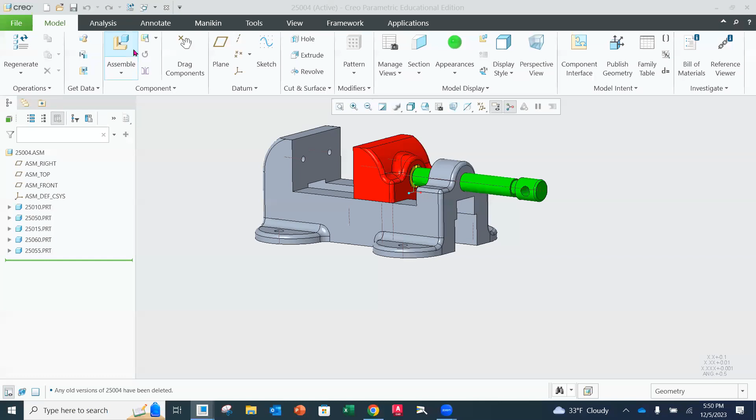As we look on our assembly, our jaw plates are number 25030. So we're going to click on assemble, and 25030, there we go. And those are going to be those jaw plates. You'll notice that it automatically comes in here. I'm going to kind of bring this down here.

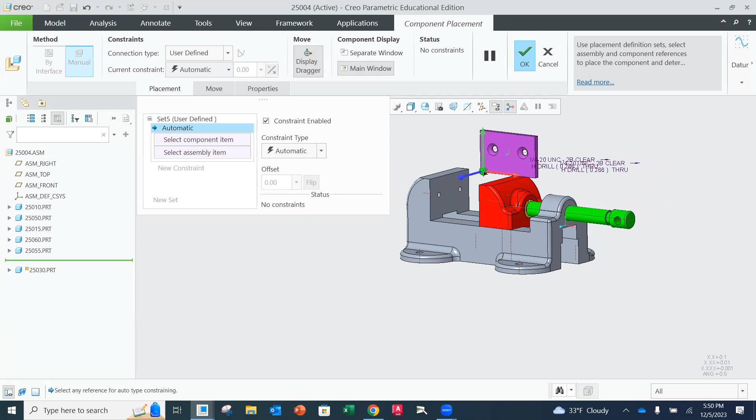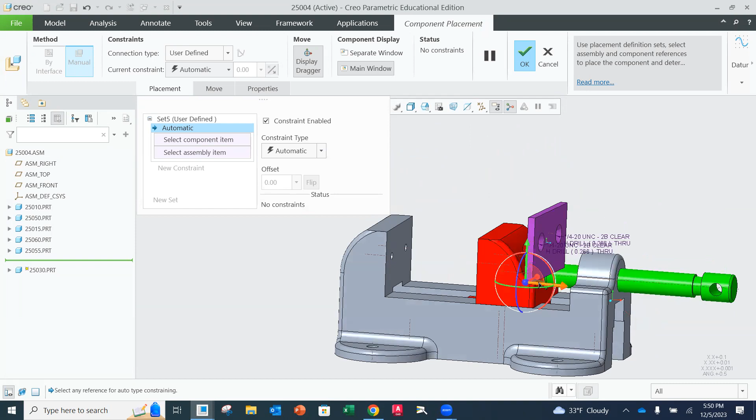I like to bring it over and get it as close to where I want it to be before I start adding constraints. So I'm going to rotate that around, bring... oh, that's not what I wanted. I want to grab... oopsie, not that one, this one. I want to pull it over here, bring it down. Again, it doesn't have to be perfect. Sometimes it's like, oh, I thought it was closer, and it's not. So just kind of bring it over. Oh my goodness, can you believe it?

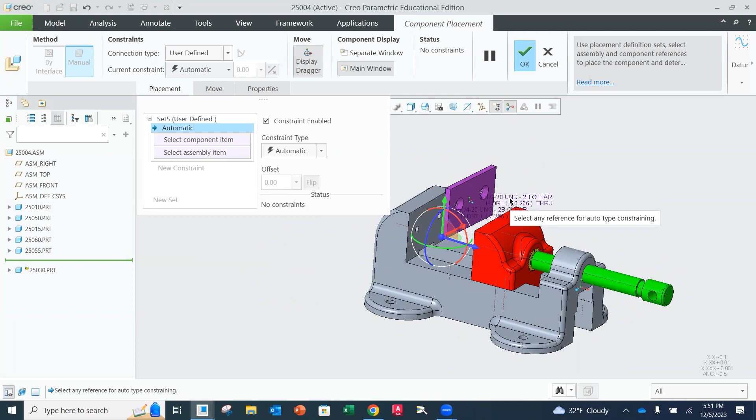Do you ever get that where you're like, I thought it was way closer? Now, the question was asked before about these callouts. I'll show you after we get this in place how to get rid of those, because in the model they're not needed and they're not going to go away for any reason later on either. It's just nice to not have them clutter things up.

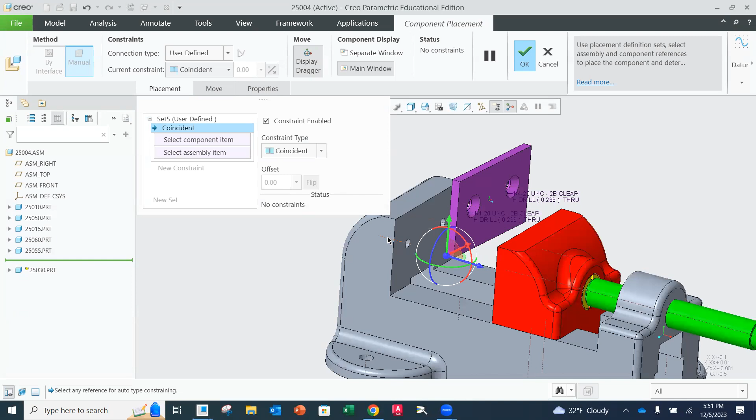Okay, so now the first thing I'm going to do is put my axes of my countersunk holes in line with the axes of the threaded holes. So I'm going to do a coincident, this axis and that axis.

Then the next thing I'm going to do is make a new constraint, coincident, this face and this face. And you'll notice that I'm fully defined.

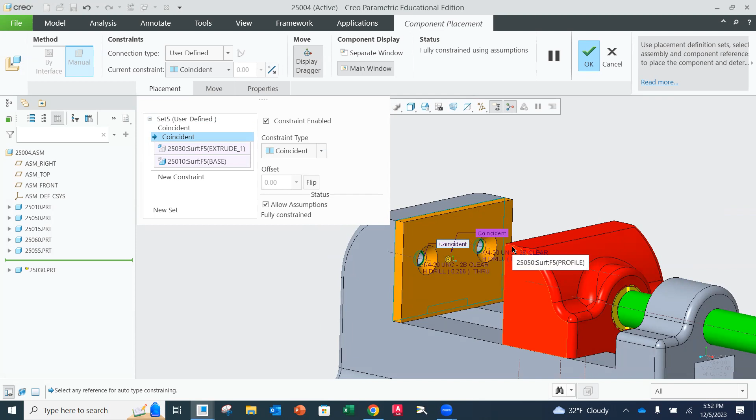Which is good. The only other thing I feel like, because remember, if I have an axis to an axis, Creo lets it be okay, but it's also good on a rectangular piece like this, especially if the sides are supposed to be in line with each other.

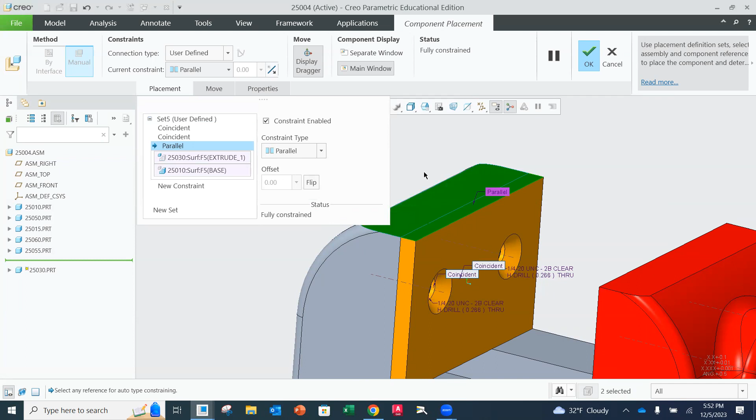Then I like to put an orientation like parallel on one of those outside surfaces of that plate. So I like to add a new constraint, just a parallel. It doesn't mean it's going to be coincident, I just want them to be parallel to one another. I'm going to take this top and this part right here, and say okay. Now they're nice and parallel and oriented, even though it would have been fully constrained the way it was. It's just to ensure it's not cocked one way or the other.

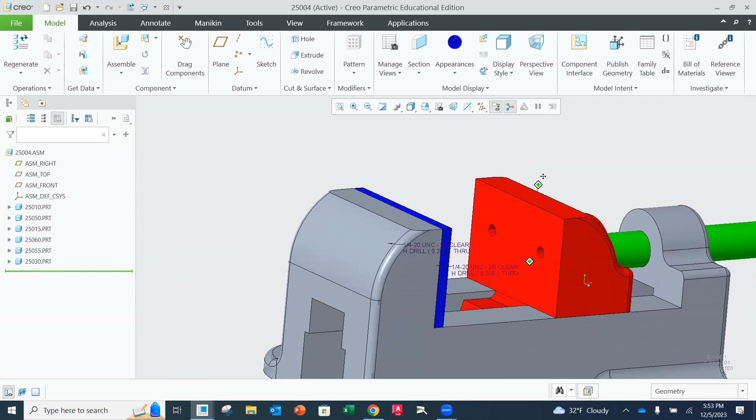Then I'm going to grab this one and we will make that blue. And then we're going to put that very same plate on the other side here of our sliding jaw.

So I'm going to assemble, grab that same part back in. Now, again, you can copy. I think somebody asked about copying the last time. Just be aware that if you copy the part in the design tree and paste it down below, or special paste it, it's going to hold those same constraints from that original part.

I like to bring one in. It's not that hard to bring it in. I like to bring it in fresh and then just constrain it to my new surfaces. But either way works, okay? You'll just have to sift through the constraints that are there.

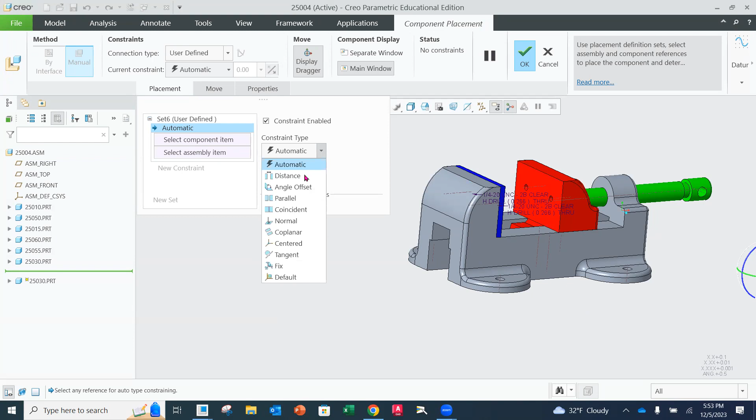Then I'm going to grab, I'm going to do coincident. Oh, no, I want to orient this first. Sorry, I forgot that I brought it in. So I'm going to bring this over here, rotate it around, pull it up and forward. There we go.

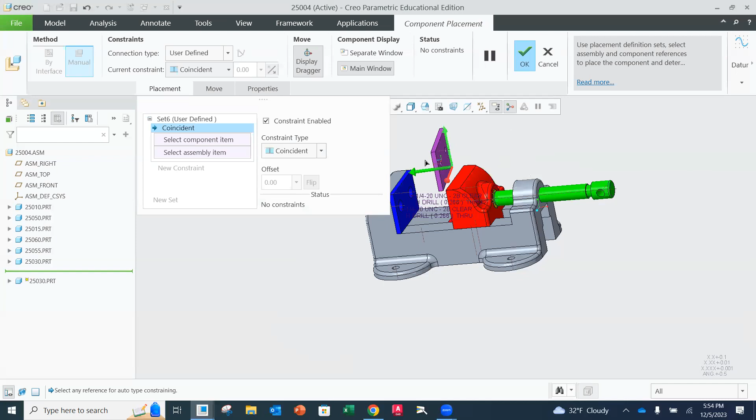And then I'm doing coincident, so I want one of these axes to be coincident to the other axis. And then I'm doing another constraint, coincident from this surface to this surface.

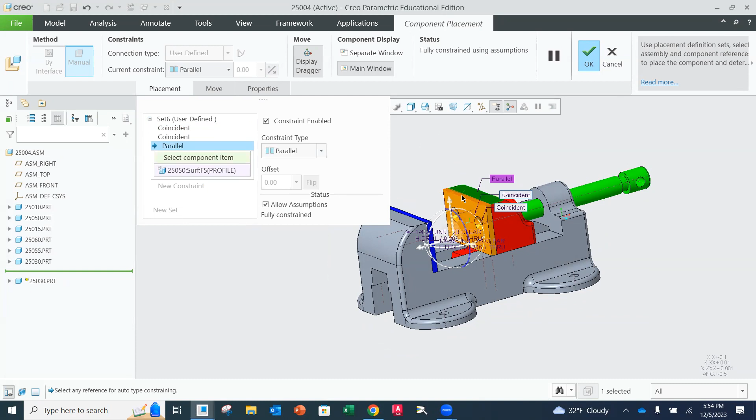Now I am fully defined, but I'm going to still add a parallel of the top to the... see, it's rotating around. Which way did it go? The top to the top. There it is. So that's going to ensure that it doesn't rotate around.

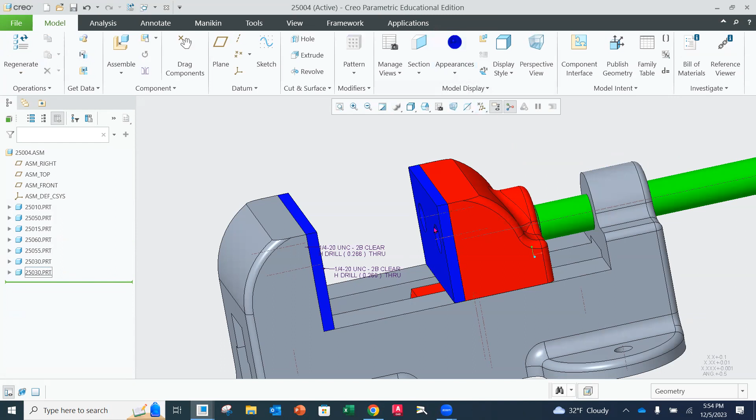So now I'm okay, and I'm going to change that one to blue as well. So now I'm going to get rid of these callouts. I'm going to grab that one, left click, slow right click, and hit hide. Left click, slow right click, and hit hide. There we go. Okay, this looks good.

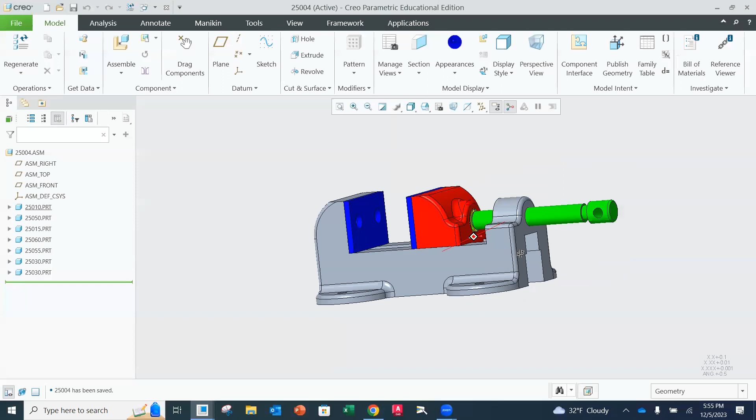I'm going to put the hardware in at the end, so we'll leave those countersunk holes open for now. The next piece I want to pull in is going to be the set screws that are going to go into each one of these holes.

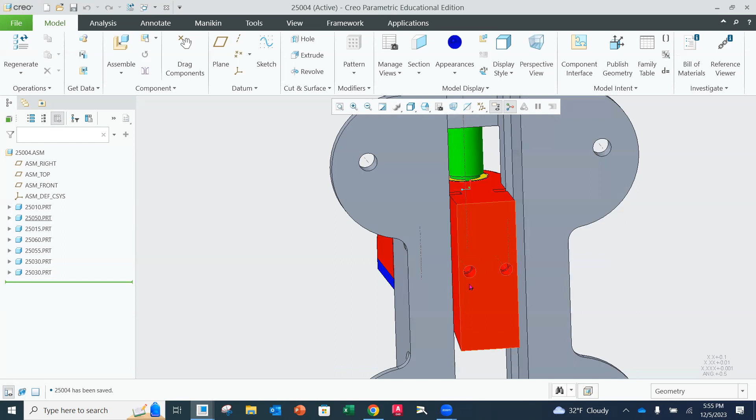Okay, the set screws. So I'm going to look on my assembly. My set screw is number 25040 — it's one that I have to change. I'm going to do my file, 25040, and bring it in. It's down over here, so let's get it a little closer.

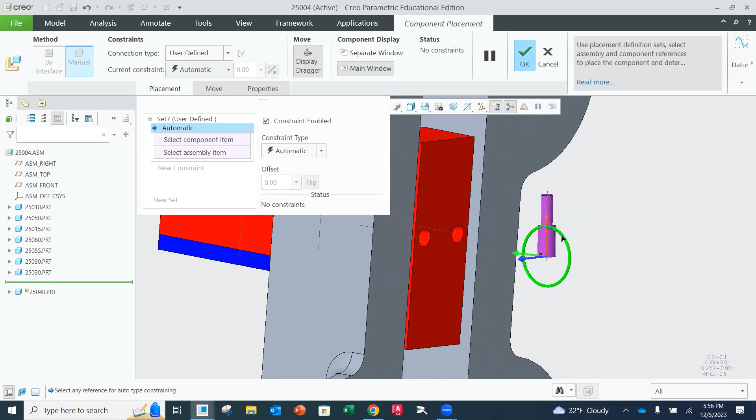You'll notice it's sitting upright here, so I'm going to rotate it around this way so it's in line. The first thing I'm going to do is make coincident the two axes. I'll hit coincident, grab this axis and that axis, and now that axis is in line with that one.

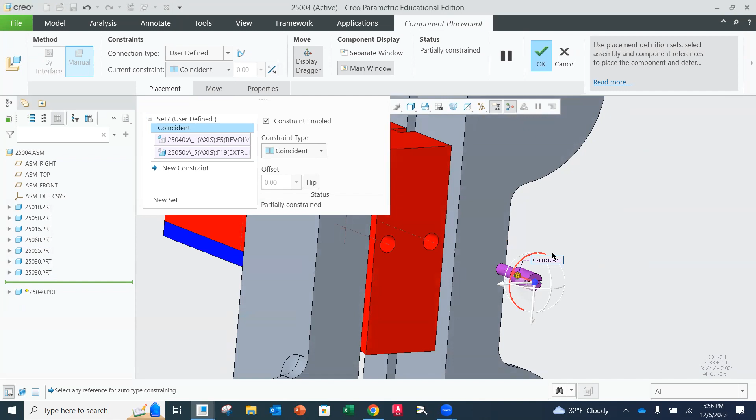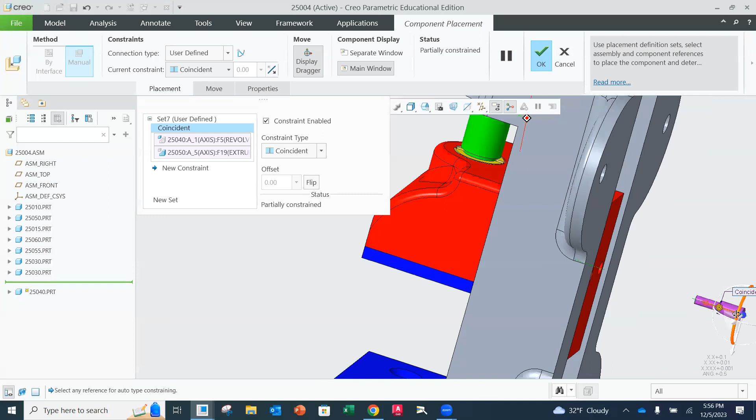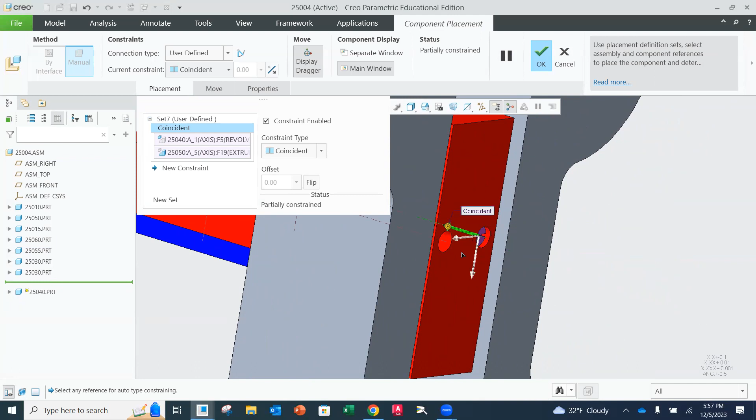Now you'll notice, and I was fooling around with this and it's a little different every time, so let me shift this over so we can see. There's this surface all the way in — that's where the edge of my set screw, that shelf or shoulder, is supposed to line up. But it's so hard to get that little surface bumped up against the other. So what I found easiest: now that these are on the same center, we'll push this in a little ways and add a new constraint.

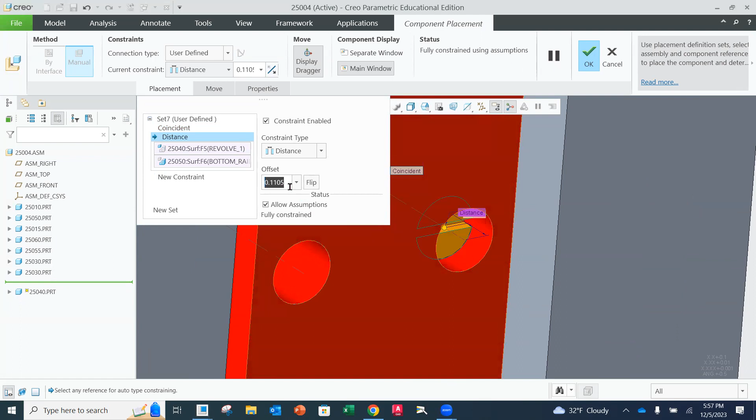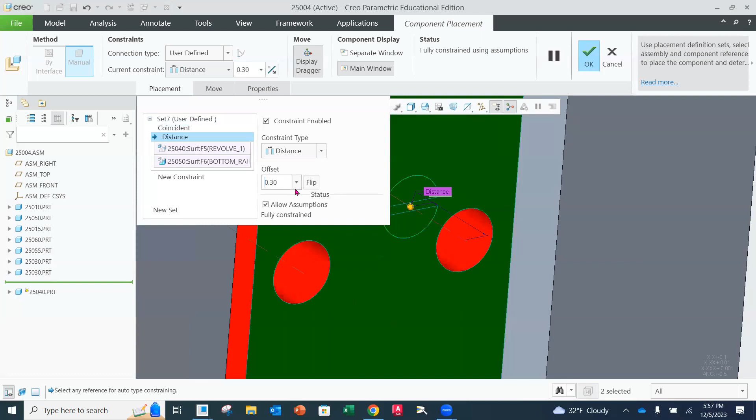That constraint is going to be distance. Our distance is going to go from this outside surface here to the outside surface on this end of the set screw, and we want the offset to be 0.3. So it's going to sit up in there, 0.3 as the distance offset. If you try to get those shoulders to coincide, tangent comes up most often, and then you have to back it out and try again — it's so touchy. So distance seems to be the best way to do it here, a distance of 0.3 from each one.

So let's do the other one the same way. I'm going to say okay, because now it's gold and it's in there. Then I'm simply going to change its color — we'll make it yellow.

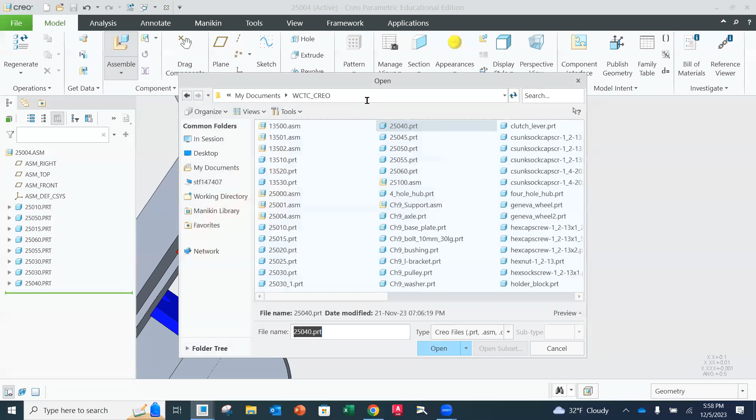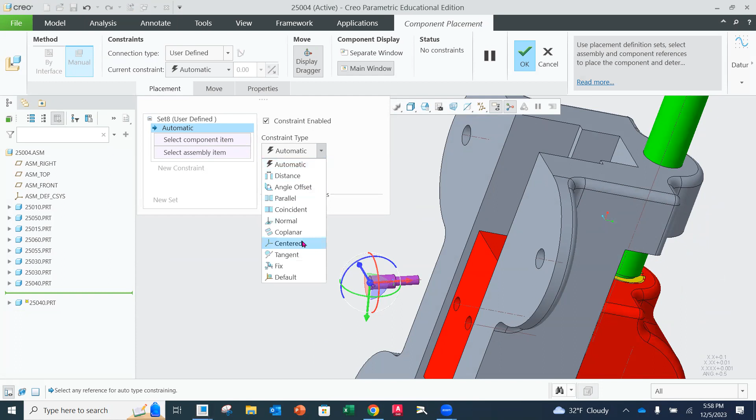Now we're going to pull the other one back in. I'm going to assemble 25040 again, open it, zoom out and shift over. I'll bring this one over here, zoom back in, and flip it so it's pointing in that direction-ish. First we'll do a coincident on the axis here to the axis of the one on the left. There we go, it's in line.

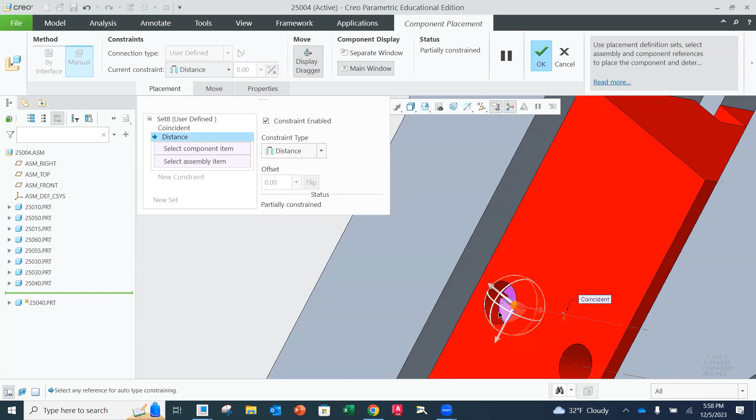Then we'll do the same thing — push it along so it's on the inside, that way it's on the correct side, 0.3 up into the sliding jaw. New constraint, distance, from this surface to that surface, offset 0.3. Enter, okay, and okay — fully defined. We'll make that one yellow as well.

So my screws are up there — good time to do a quick save. Questions so far? Okay, all right.

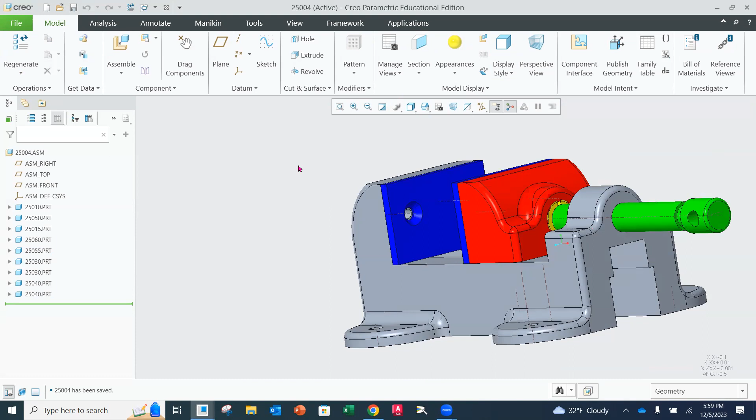So good, so good. Now we've got to get our little keys in there — our sliding keys. I'm going to get rid of the base, because I need to see in there. I'll click on my base and simply say hide. We're going to be putting those sliding keys along each side here.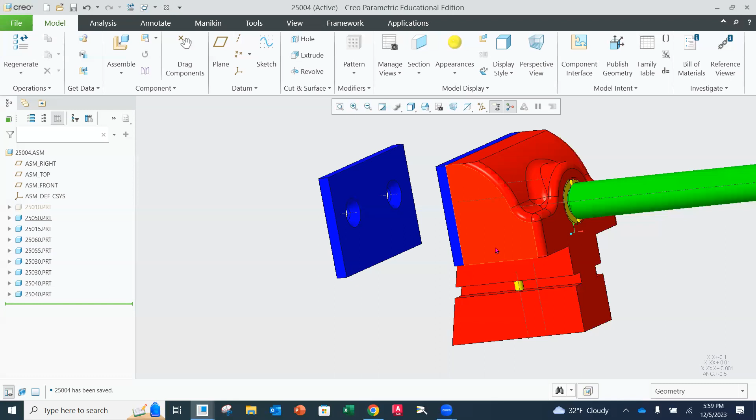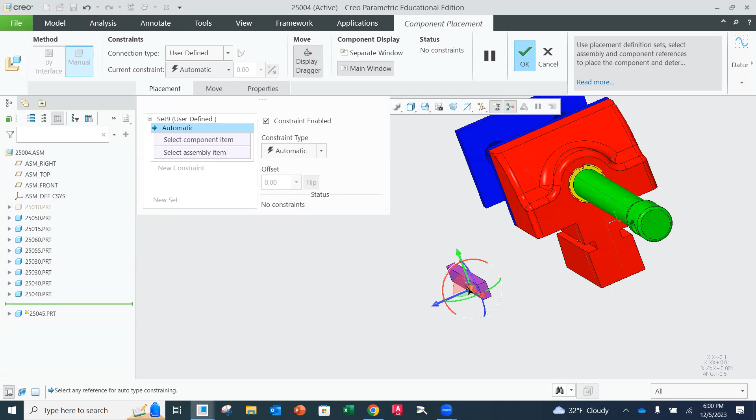So we're going to pull in the sliding key. The slide key is number 25045. I'm going to hit assemble, open it, and pull it up over here. Grab the ball — there we go. Why is this so hard? Come on.

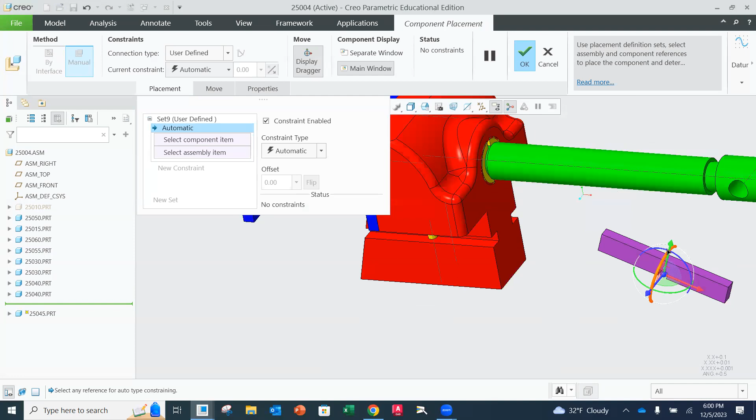I think I'm the only one who struggles, not really struggles, but it just takes me a little while to get things oriented for some reason. Get close in there. Come on. Okay, alright, neither here nor there.

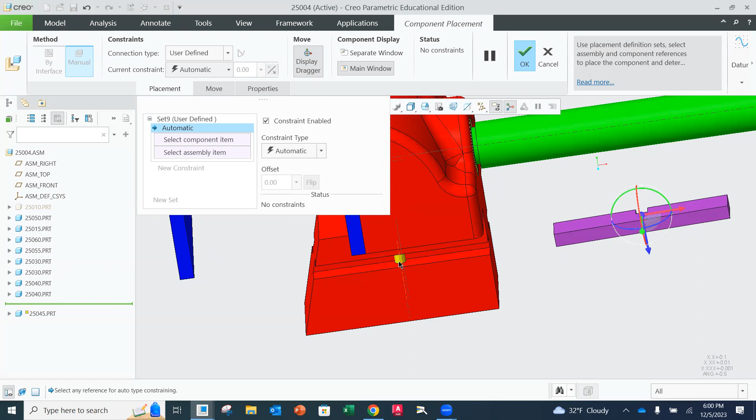Let's get it constrained here. So I want to rotate this over so that my notch is towards the inside. This notch needs to be where that screw is by design. So I'm going to bring this down over here, a little bit further and under.

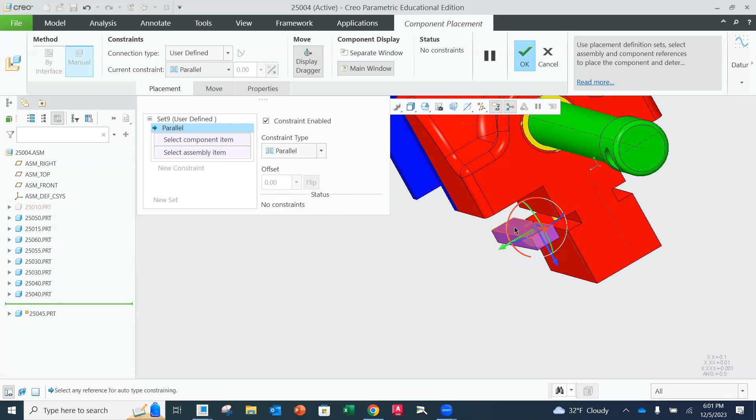And in. So orientation-wise, I'm trying to think what the easiest way to do this is. I have mine all on planes, center planes. So I'm going to do a parallelism first, from this top surface to the top surface here so that they are on the same plane. Additionally, I'm going to do another parallelism on my inside surface here to that inside surface right there.

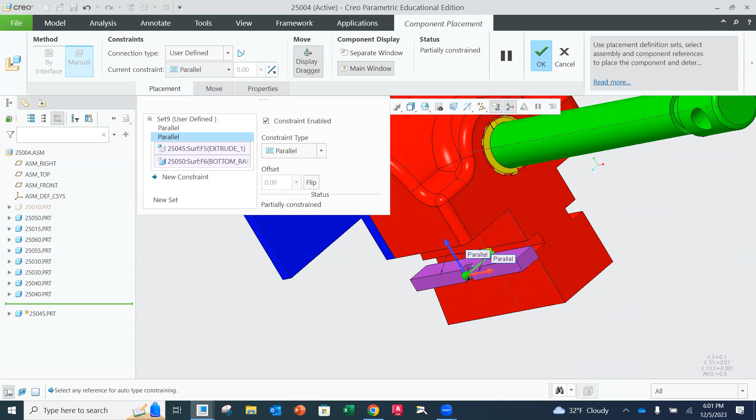Okay, so this is just orientation, making sure it's going to float around here, but those planes are parallel, kind of squared up to each other. Now I've got to get it constrained in position. So I can make a constraint that is coincident of this front face to that front face, so that those are in line with one another now.

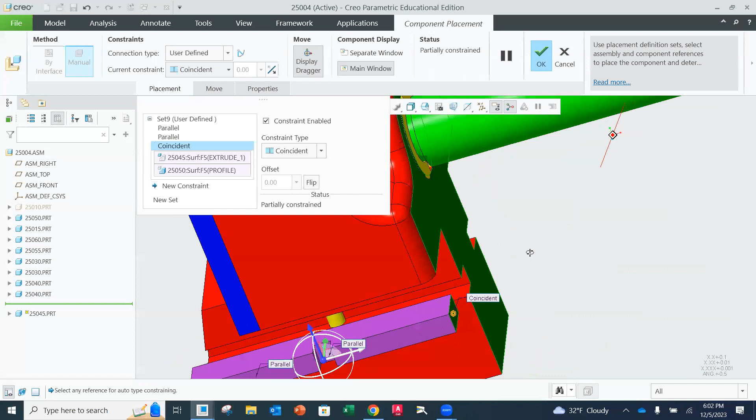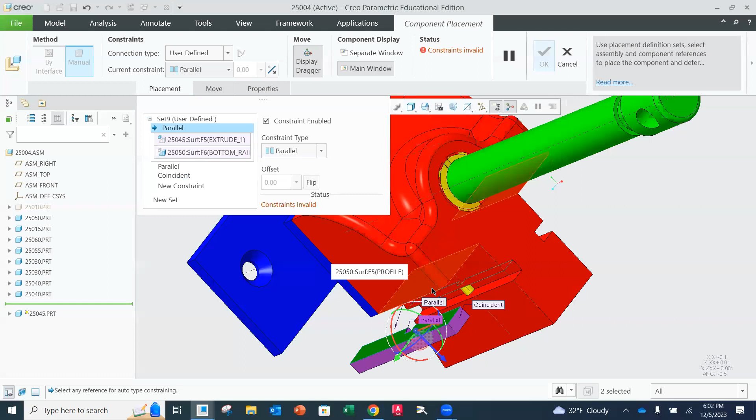Ooh, look at this, it actually flipped over on me. Do you see that? So I'm just going to go back to the constraint where I had the parallelism this way, and I'm going to do a flip on that. And I should be able to, there we go. There we go, parallel, should be parallel.

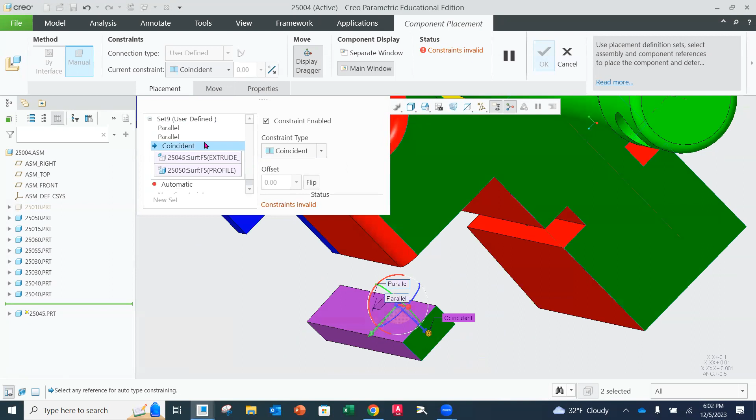And then my last constraint is going to be another coincident. Something happened here, let me go back for a second. I'm going to delete this one, I'm going to delete that one.

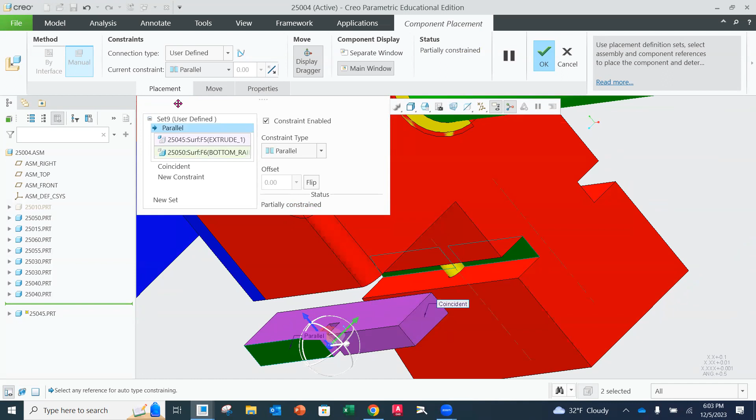My parallel, this was to that surface and that surface. And then I want coincident on this one and that one. I think I need to get rid of that first, and I need to rotate this over. There we go, I need my cutout to be on the inside. New constraint.

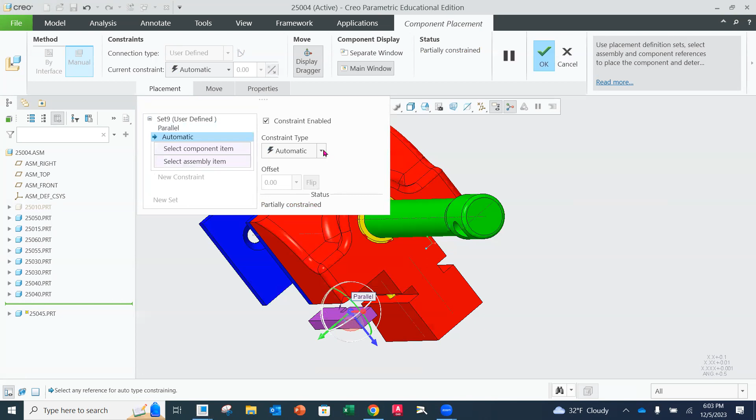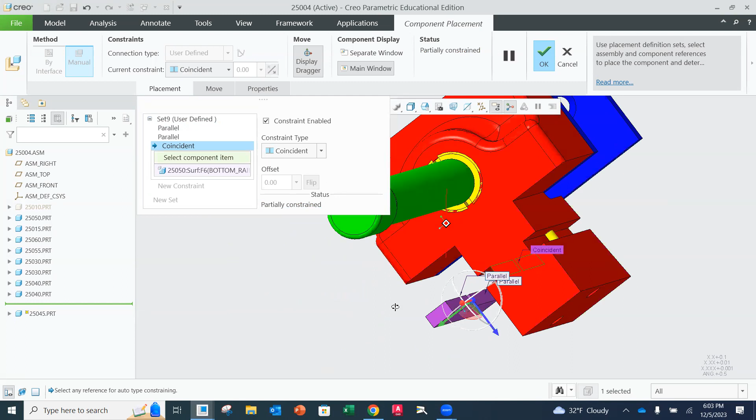And I want this surface and that surface parallel. And I want a new constraint, coincident, on my inside surface here and the inside surface there. Good. And I want to do one more where I've got my coincident on my front face now and that face.

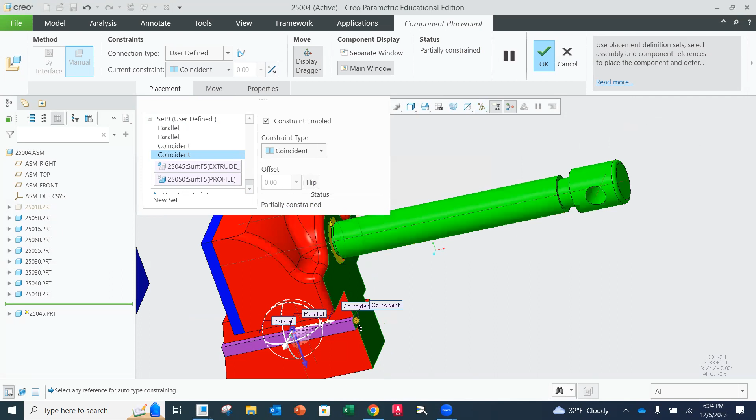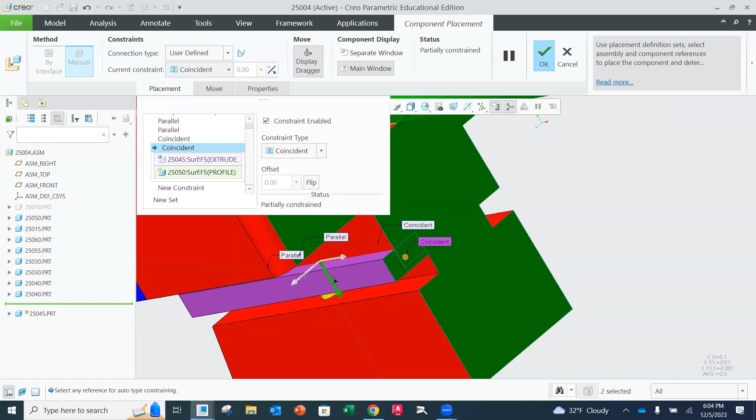Did it do it? This surface. Oops, I think I... did I not do that one yet? Oh, I've got this one. Yep, you're right, so this one is my last one that I need to do. So I need to add one more coincident.

Go down here, new constraint, coincident, and it's going to be this surface to, sorry, I gotta get out that surface underneath. I don't know if I'm getting it. That surface under there, there we go. Thank you.

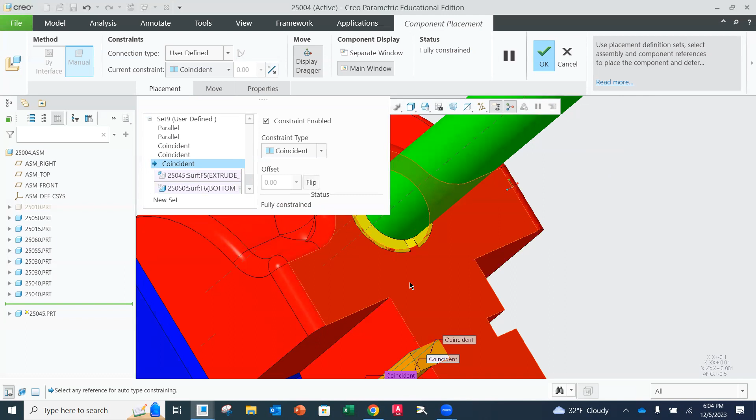Hmm? I have it to the... I'm not sure, I was going to just check that. So if we look at, I'm going to hit OK, and we're going to look at that.

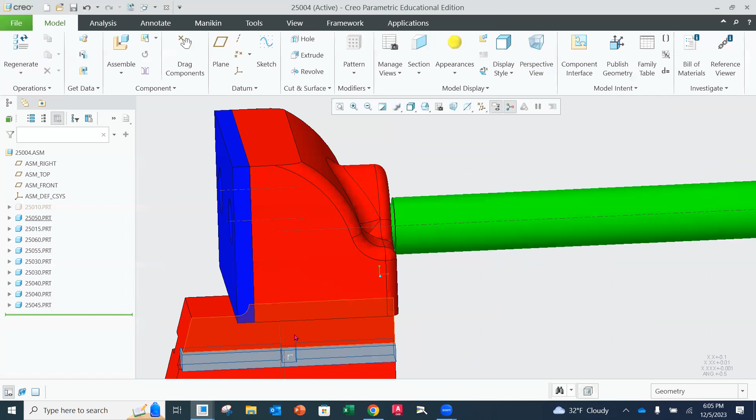We're going to see if... I want to grab, is it this one? Yep, and I want to hide that. And I want to be sure, yeah, look at that. We have a problem, don't we?

So what do we need to do? What do we need to do? Notice that my screw is not into here. So that was, I knew that was going to happen. So now what do I have to do? Any ideas?

I can move it back, can't I? Well, but that is constrained actually to the inside of the sliding jaw. So the screw can't go to the side of this slot because it's already constrained to the center line of the inside of the sliding jaw. So that's in place because of the sliding jaw. I have to adjust this back and forth, right? So what could I do?

I could do a plane, a center plane through there. What else could I do? Are there any other options?

But then it's in contact. You want to make sure that it's further in. You could do a distance from that front edge, because there's a little bit of play in there, and you could see if you could get that distance to work. So there are a couple different ways to do it.

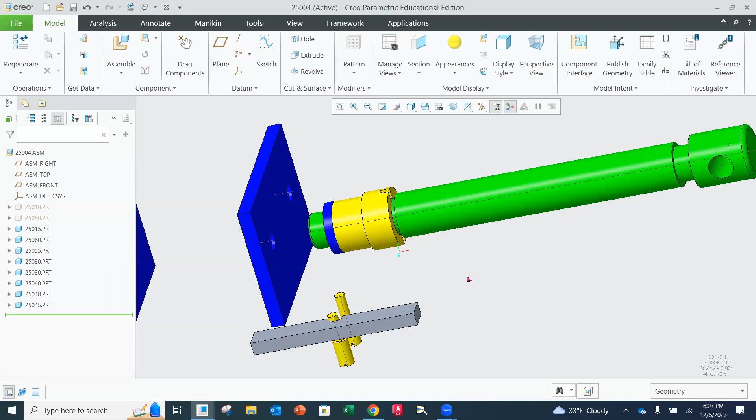Probably the best way to do it is, as Josh had said, a plane on the middle of the inside of this, and then that shares a plane with where those set screws are. Oh, I got a chat message. Is there another idea? Yeah, a distance constraint could work.

Let's unhide our sliding jaw and go back into this one. So we had a coincident constraint, we just got to find it. I think it was the second to last coincident right here. We had this one. So instead of coincident, we're going to change that to distance.

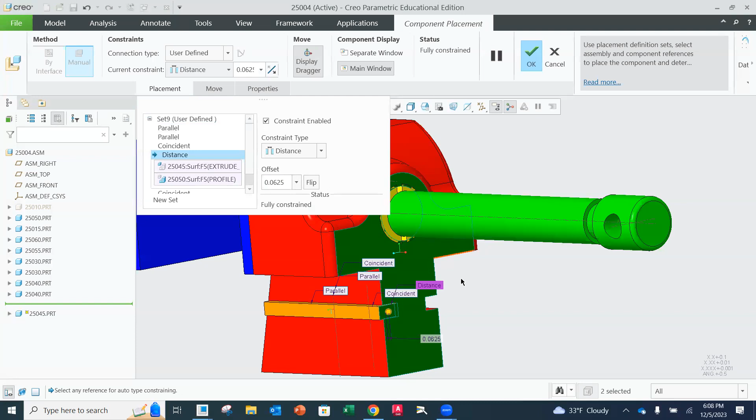I'm going to go 0.0625 and we'll see. Now which way did it go? It went out, so I want to flip that distance so that it goes in. I thought it was going to flip. There we go. I think we might have to do a negative 0.0625, that's a 1/16 of an inch.

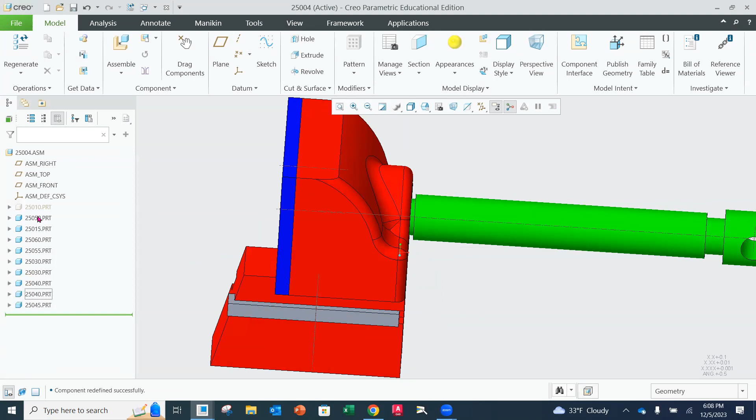Okay, let's see how that worked. So I'm going to go here. Oopsie. And then I'm going to go back and hide it, and we're going to see. Oh, it was a little far. Okay, so then you can adjust it again.

So if we go back, I think I've got to unhide that so I can see it when I do my constraint. All right, and I'll go back here and adjust that distance to be 0.05. Okay, let's see if that works.

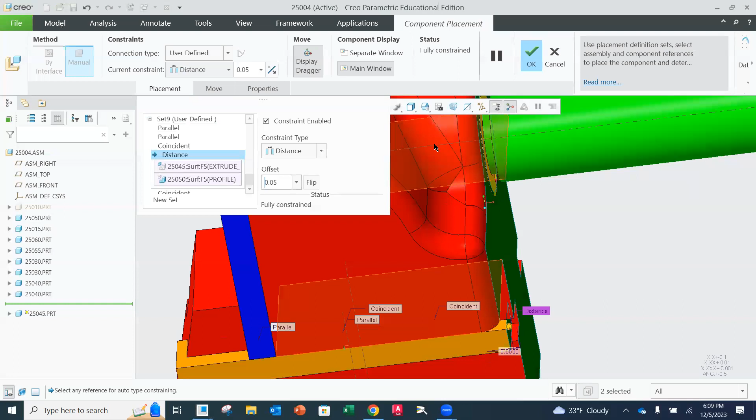I mean, totally valid, or you can line up planes. So now it's a little bit in. We're going to hide this and oh, look at that, it's in there. So that would be totally okay to do it that way. So 0.05 would be a distance constraint.

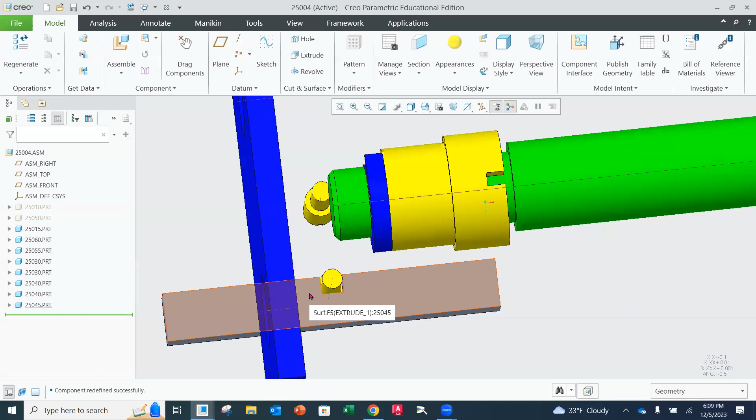I think I'm going to stick with that. You could put planes in place and then line up the planes as well. All right, either way, does that make sense to everybody? I think the distance is probably the easiest, so we'll do that. What was that?

0.05 I got from that front edge. Yep. And I'm going to change my appearance here. We'll make this one, we'll do this one red.

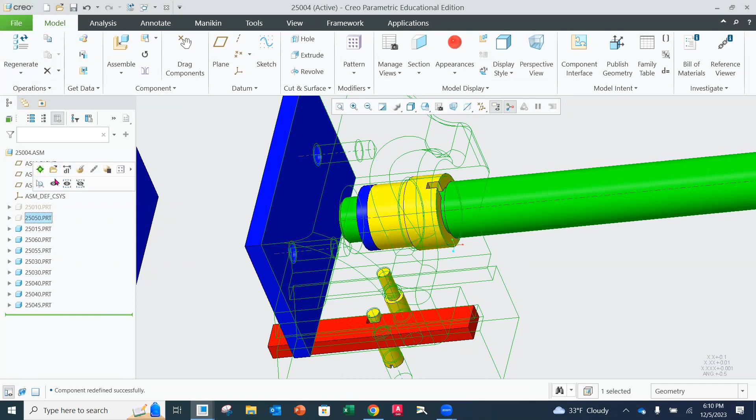Okay, so we'll bring that in again. I'm going to unhide. Oh, not red, red's not a good color, we'll do blue. Okay, we're going to unhide and then pull that slide key back in and do that same process with an offset, sending it back 0.05.

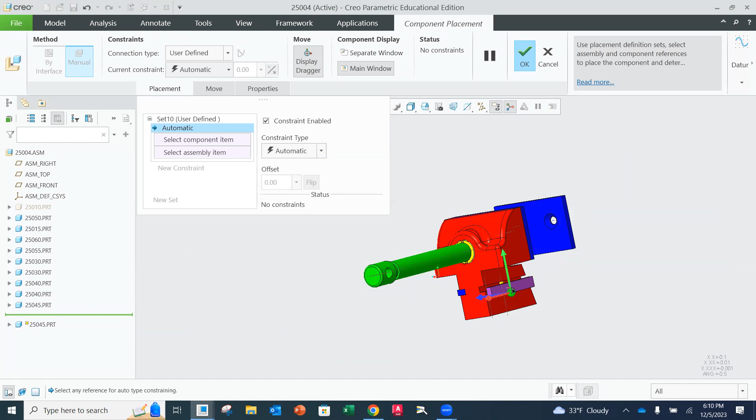So I'm going to go to assemble, 25045, go all the way over here. Rotate this way. Pull this in. We'll start with our parallels.

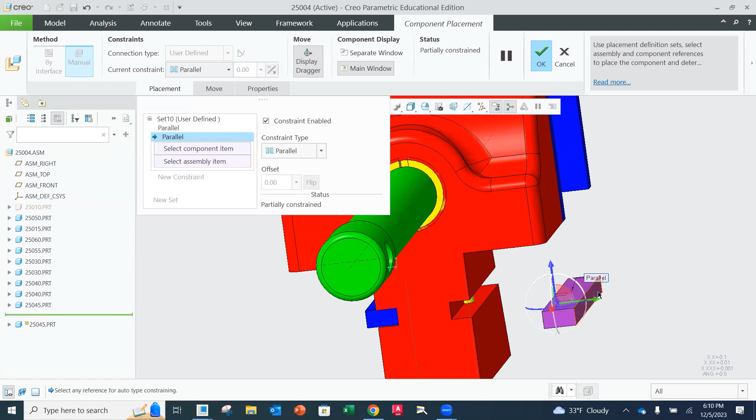I'm going to say this surface, I'm just going to do the bottom surface because it really doesn't matter which one, whether it's the top or the bottom. Another new constraint, parallel, I'm going to say this outside surface to here. So those are nice and parallel.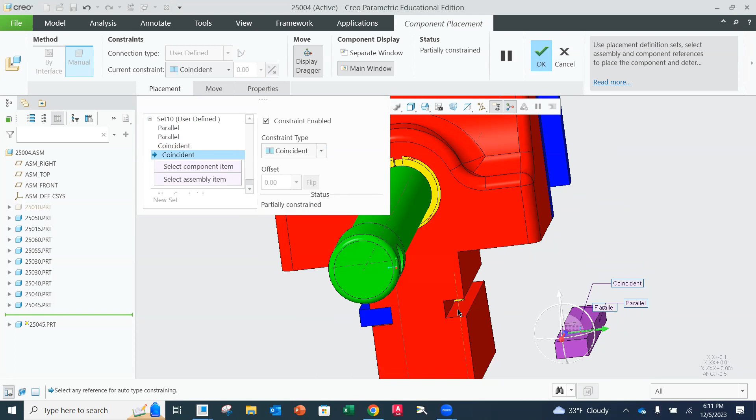Now I'm going to constrain this so that we have a new one to be coincident from the top to the top, so those are at the same level. And then we're going to do the in and out, new coincident, and now it's going to be this inside plane to that plane.

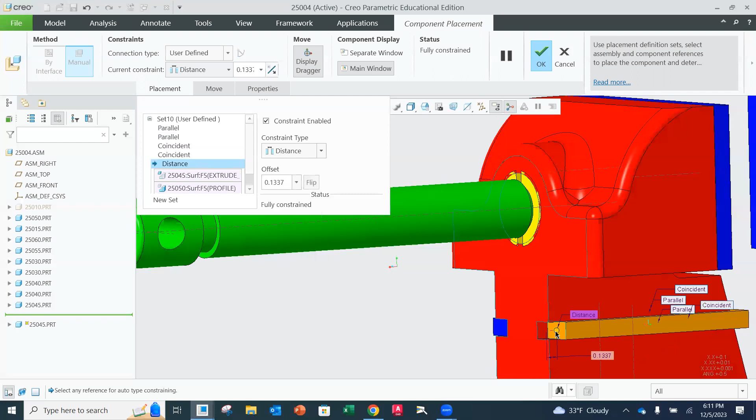All right, and then lastly, we need to get this in here, right? So I'm going to scooch that in a little bit, and then we're going to add that distance. Distance from here to here, 0.05. There we go.

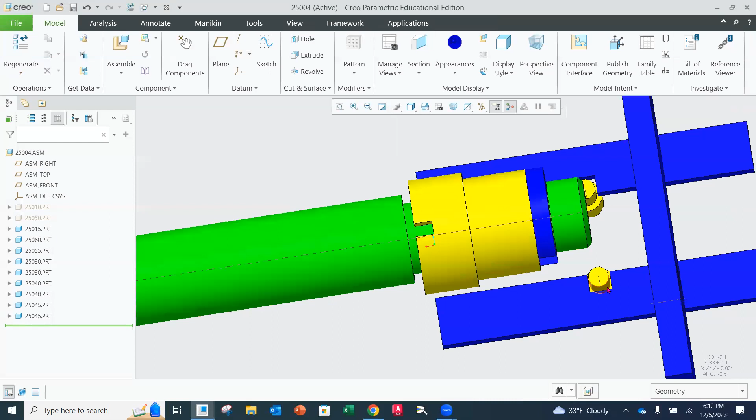Okay, and we're going to hit OK, and we'll change this to blue. And then we'll check it just to be sure, which it should be totally good on this side. We're going to unhide it.

And sure enough, we've got a little space on either side there of that set screw as that comes up. Perfect, I like it. So I'm going to unhide that. And now we have our base back in position. We've got our set screws underneath, we've got our slide keys in place, and we're going to hit save.